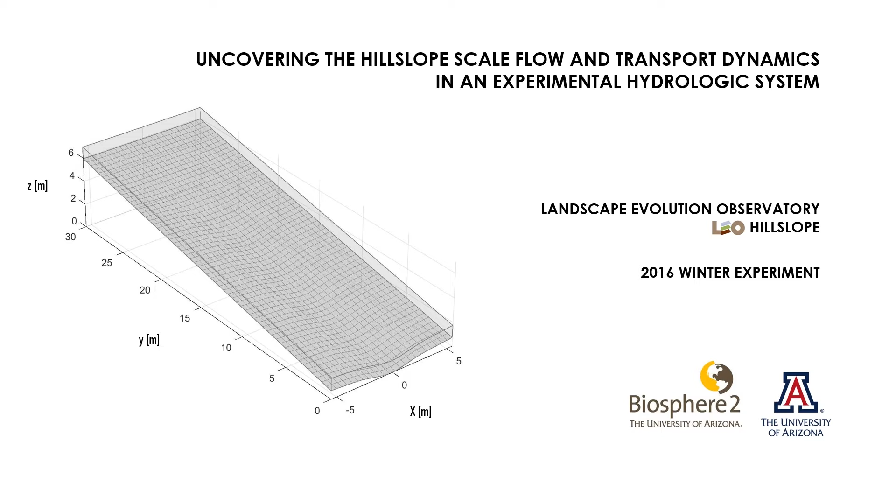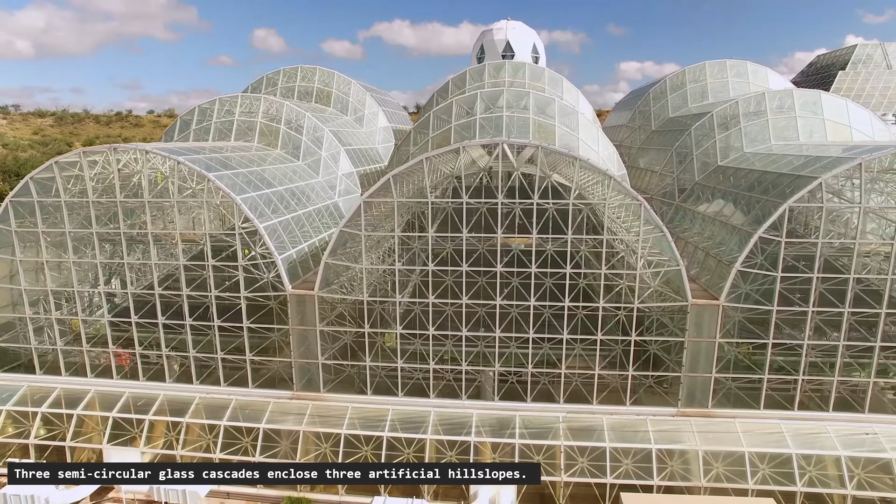The Landscape Evolution Observatory, LEO, is located within the Biosphere 2 research facility in southern Arizona. Within this structure, 3 semicircular glass cascades enclose 3 artificial hill slopes. Let's take a look at one of the hill slopes from inside.

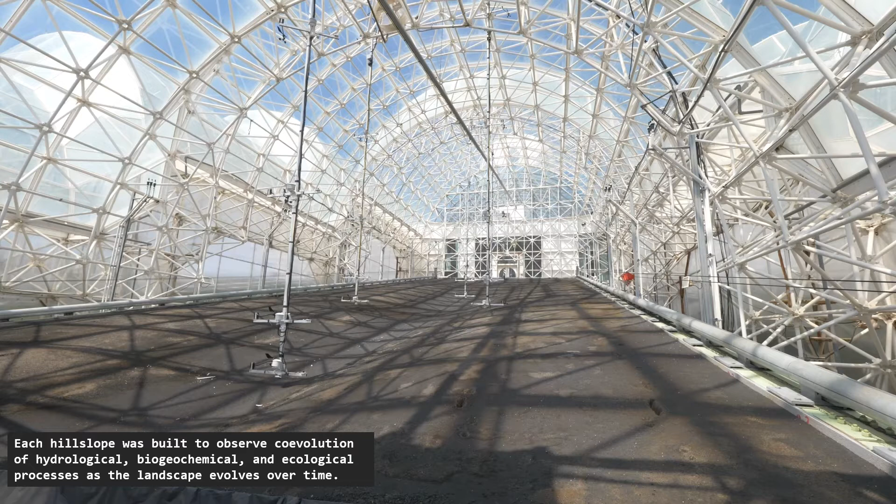Each hill slope was built to observe coevolution of hydrological, biogeochemical, and ecological processes as the landscape evolves over time. LEO is currently in a bare soil phase. In coming years, researchers at LEO will add vascular plants to drive the landscape towards a more complex system.

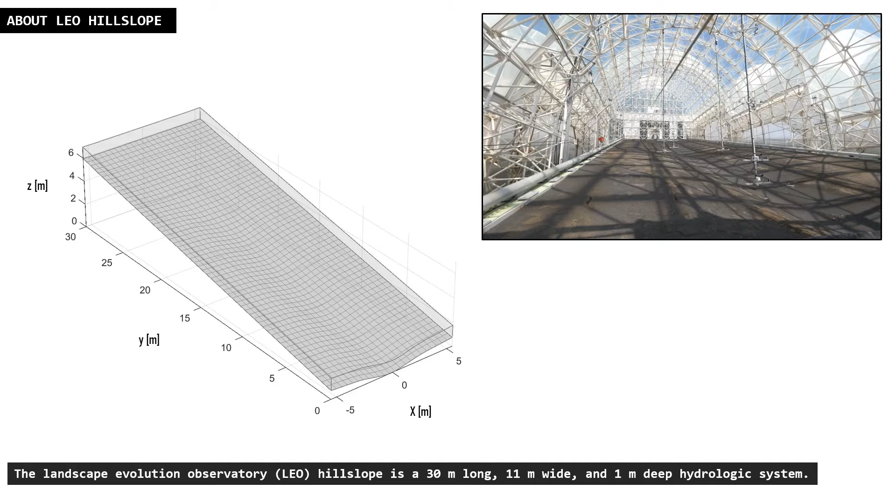The Landscape Evolution Observatory hill slope is a 30-meter long, 11-meter wide, and 1-meter deep hydrologic system. The LEO hill slope is a zero-order basin with a convergent topography and an average slope of 10 degrees.

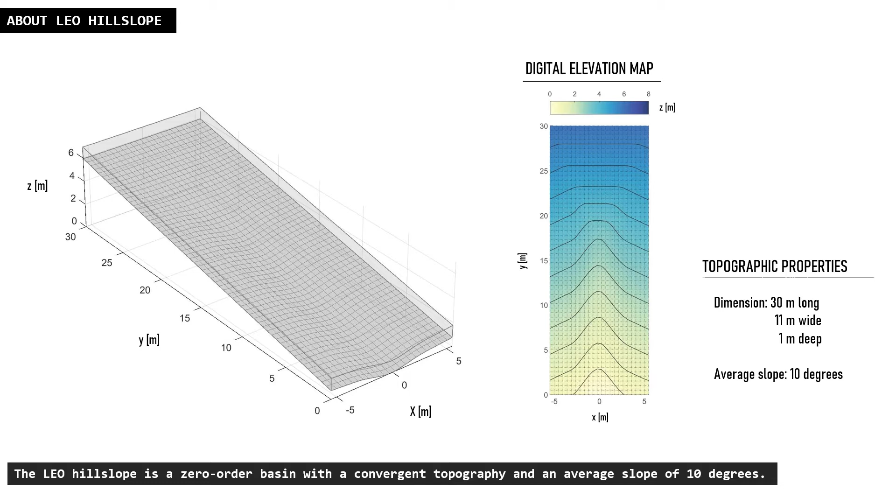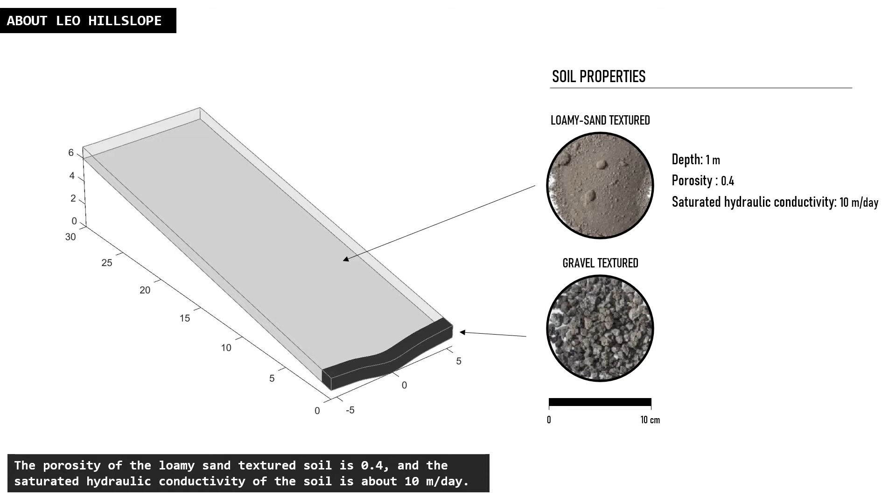Each hill slope is primarily made up of loamy sand-textured basaltic tephra. The most downslope, 5.5 cubic meters, is filled with gravel-textured basaltic tephra. The porosity of the loamy sand-textured soil is 0.4, with a saturated hydraulic conductivity of about 10 meters per day.

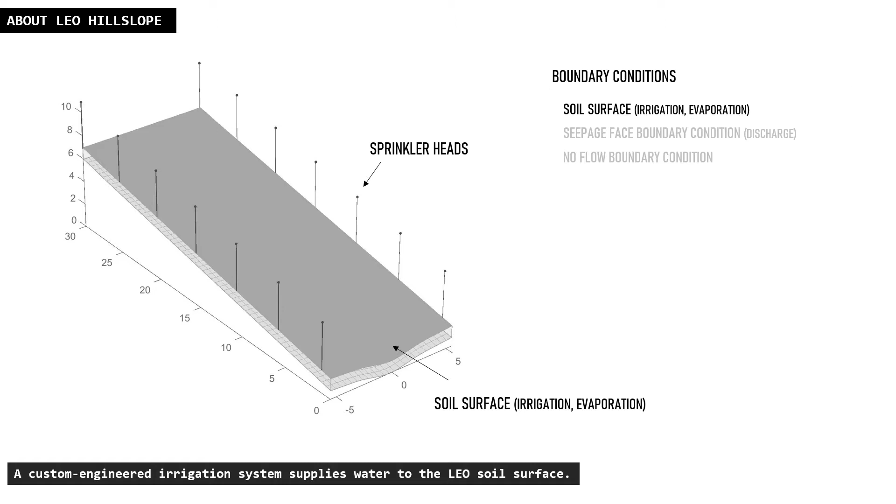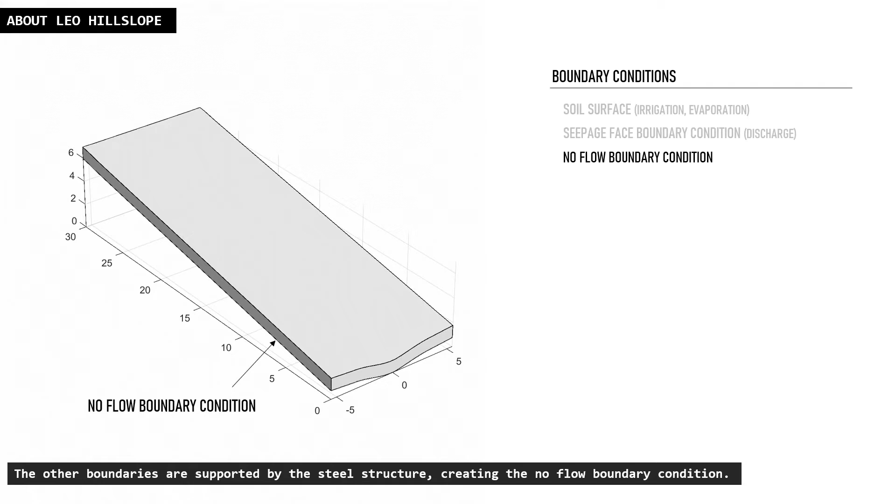A custom-engineered irrigation system supplies water to the LEO soil surface. The downslope boundary is exposed to atmospheric pressure, creating the seepage face boundary condition. The other boundaries are supported by the steel structure, creating the no-flow boundary condition.

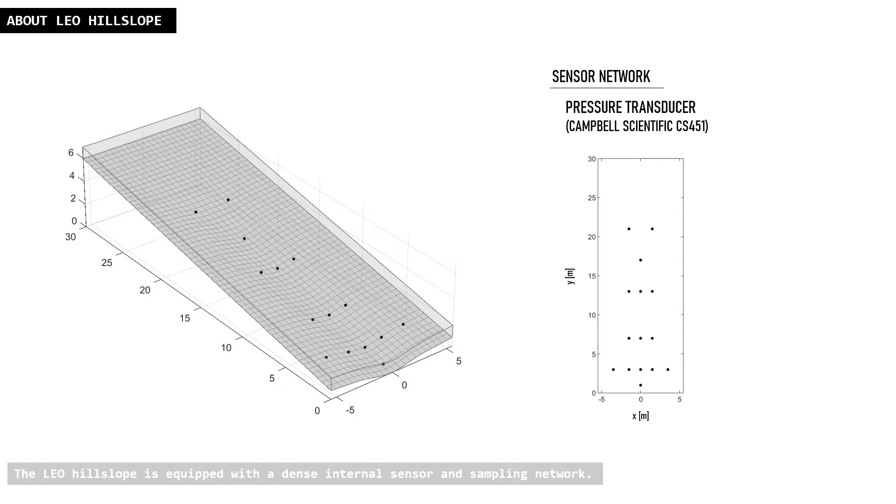The LEO hill slope is equipped with a dense internal sensor and sampling network. 15 Campbell Scientific CS451 pressure transducers measure water pressure along the base depths of the hill slope every 15 minutes. Assuming hydrostatic pressure, the measured pressure can be converted to water table height.

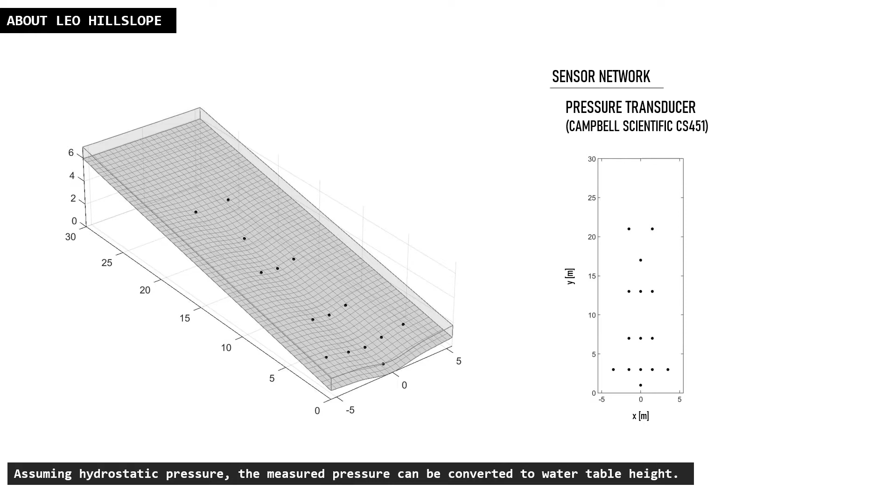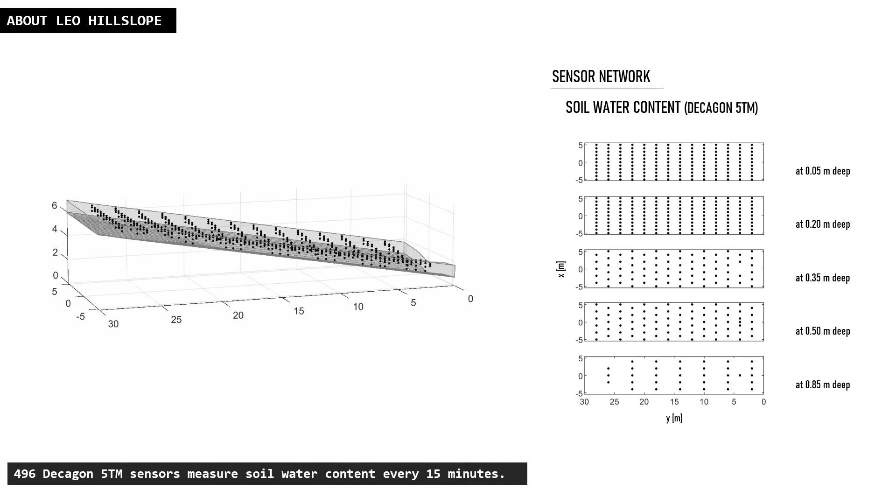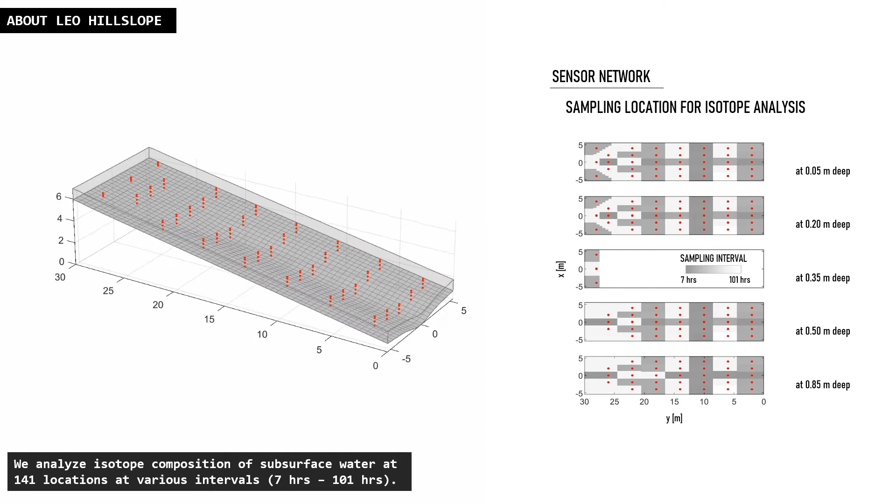496 Decagon 5TM sensors measure soil water content every 15 minutes. We analyze isotope composition of subsurface water at 141 locations at various intervals, ranging from 7 hours to 101 hours.

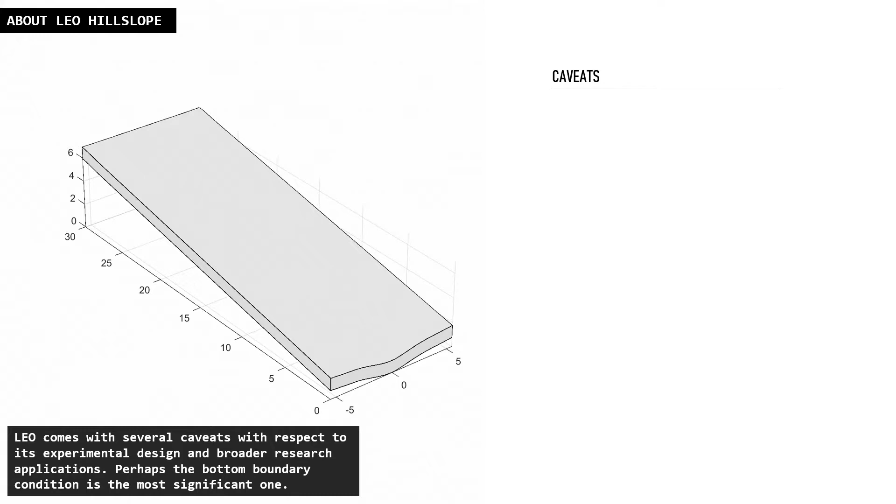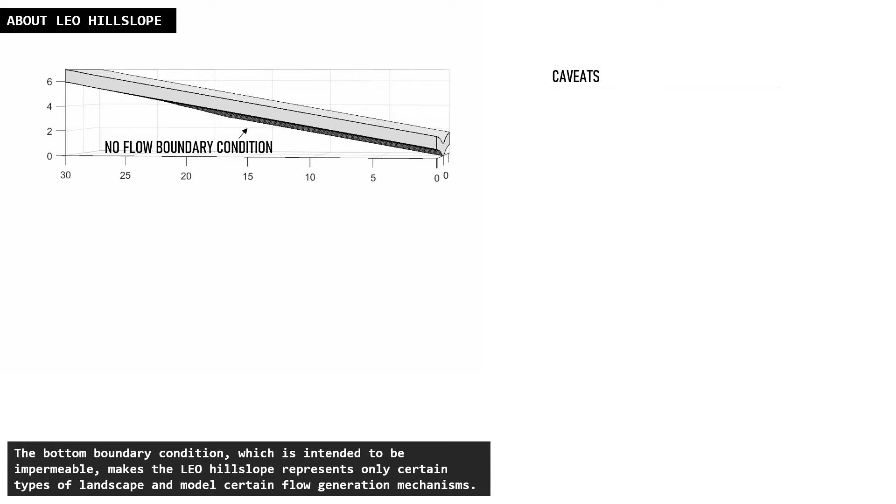LEO comes with several caveats with respect to its experimental design and broader research applications. Perhaps the bottom boundary condition is the most significant one. The bottom boundary condition, which is intended to be impermeable, makes the LEO hill slope represent only certain types of landscapes and model certain flow generation mechanisms.

The LEO hill slope mimics a landscape with shallow depth to bedrock, like the hill slope shown on the left. In landscapes with deep depth to bedrock, the dynamics inside the LEO hill slopes might represent the perched water table dynamics above an aquiclude.

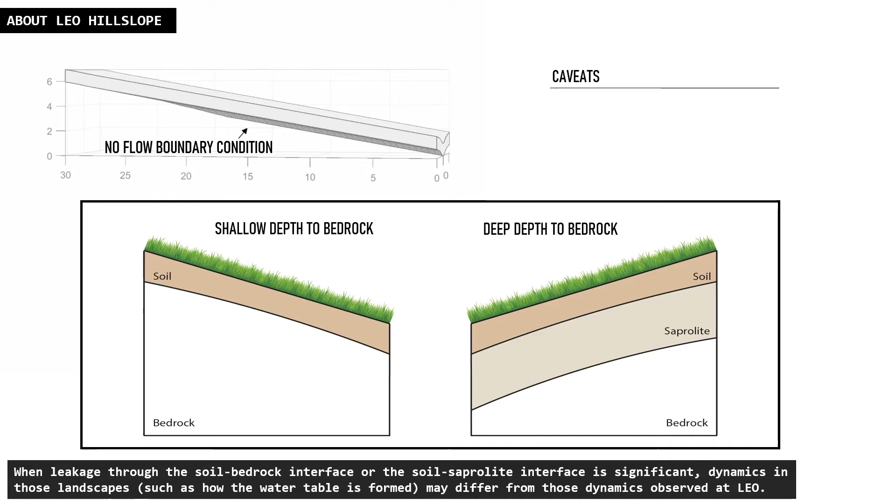When leakage through the soil-bedrock interface or the soil-saprolite interface is significant, dynamics in those landscapes, such as how the water table is formed, may differ from those dynamics observed at LEO. Again, these LEO hill slopes may differ from natural landscapes in several aspects, like what we've described in the previous slides.

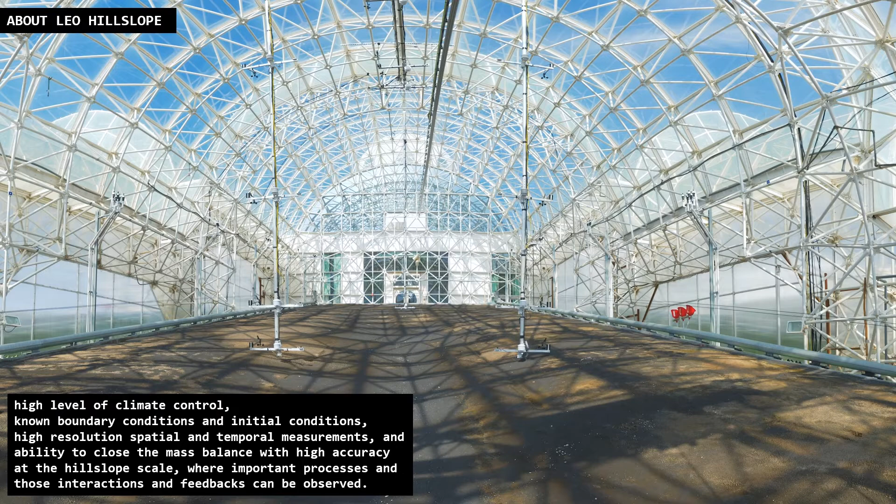In spite of these differences, LEO comes with several key advantages for conducting experiments and testing models, including high level of climate control, known boundary conditions and initial conditions, high-resolution spatial and temporal measurements, and the ability to close the mass balance with high accuracy at the hill-slope scale, where important processes and those interactions and feedbacks can be observed.

With these experimental advantages, we conducted the following bare soil experiment that gives newfound insight into hill-slope scale water flow and transport dynamics. This video presents a set of experimental data collected from December 1st, 2016 to December 22nd, 2016.

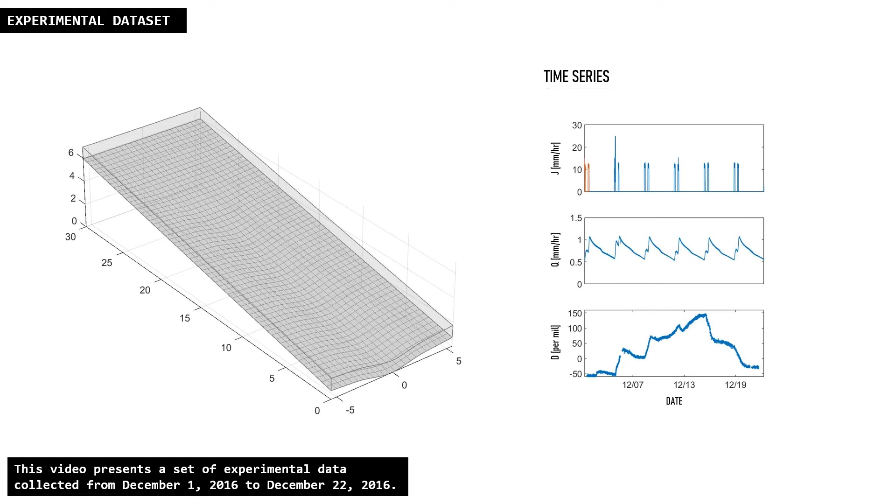During this period, an irrigation sequence was repeated every 3.5 days. Each sequence consisted of two 3-hour, 12 millimeter per hour pulses that are 7 hours apart.

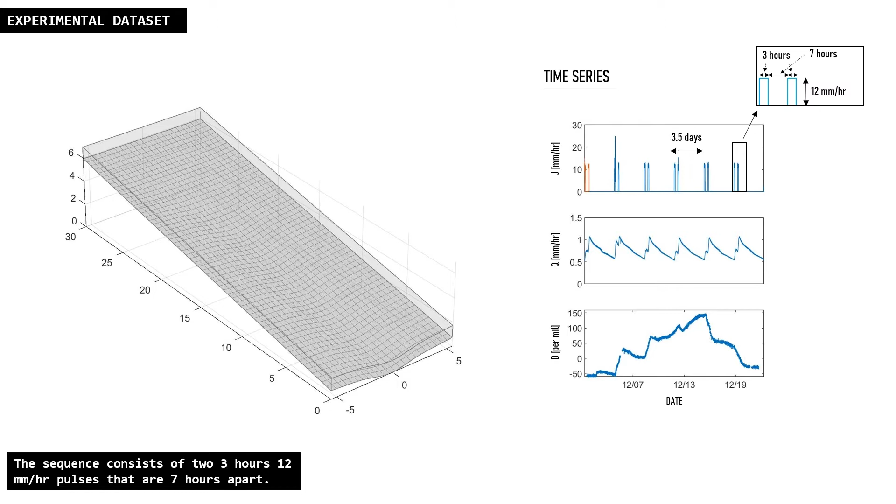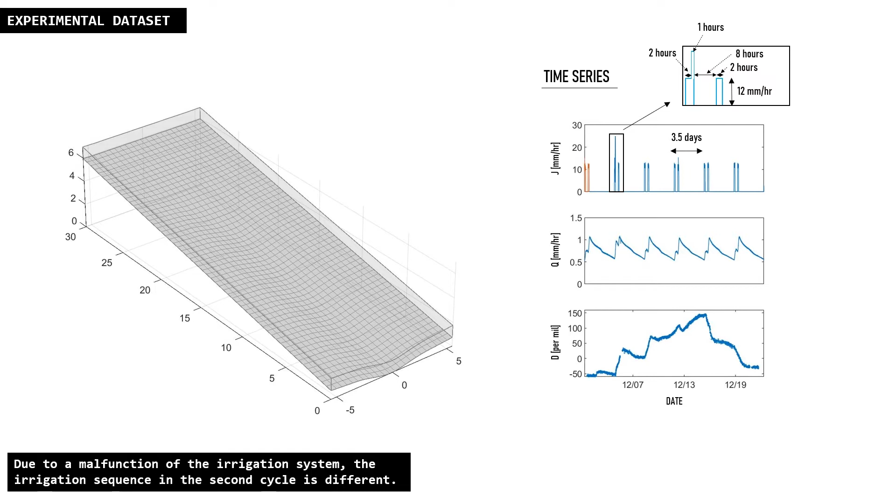Due to a malfunction of the irrigation system, the irrigation sequence in the second cycle is different. The irrigation rate during the last hour of the first pulse was doubled. Therefore, the second pulse was irrigated for only 2 hours.

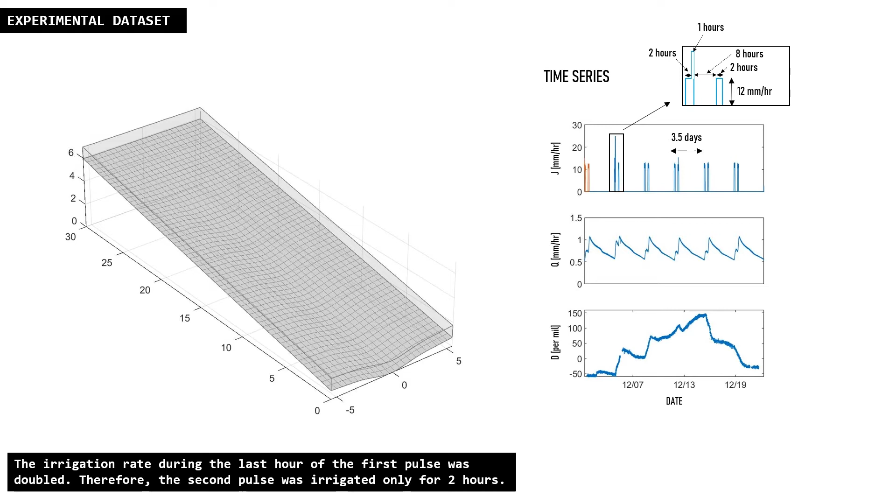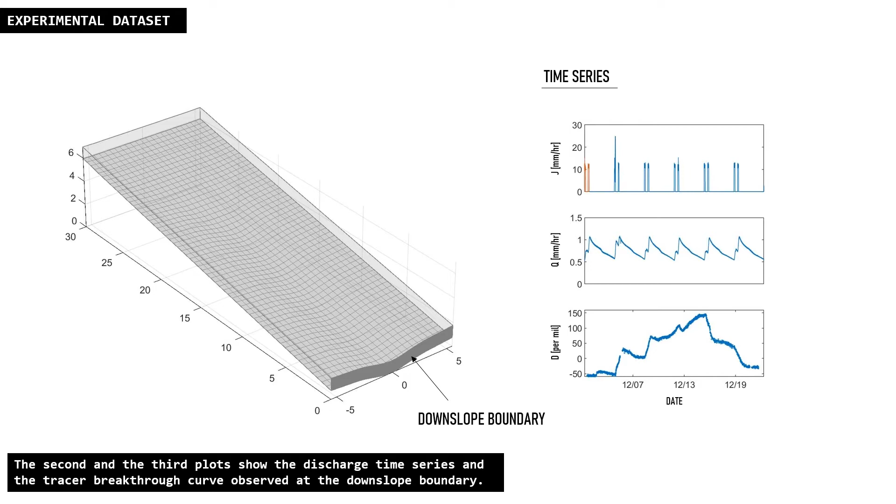We irrigated about 500 per mil deuterium-labeled water during the first cycle. The second and third plots show the discharge time series and the tracer breakthrough curve observed at the downslope boundary. Let's take a look at the flow dynamics.

For visualization purpose, the soil depth is magnified by a factor of 3. In this 3D animation, the extent of the saturated zone is the Delaunay triangulation of the observed water table height at the 15 locations.

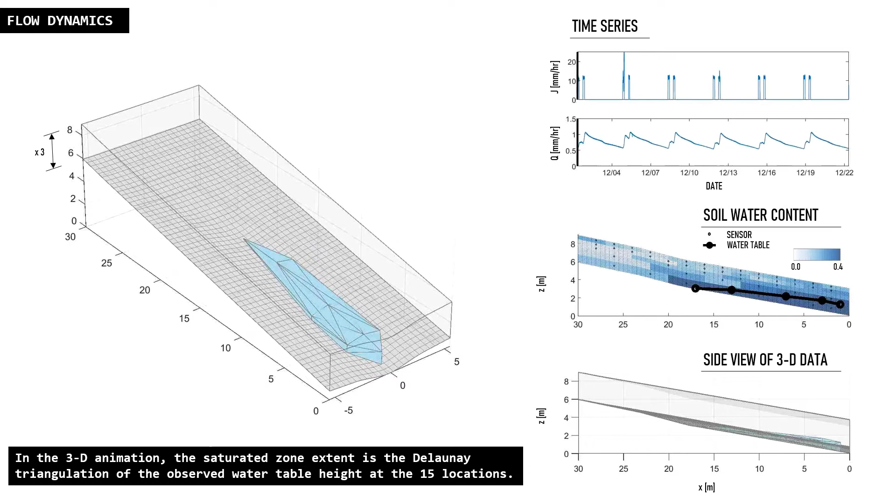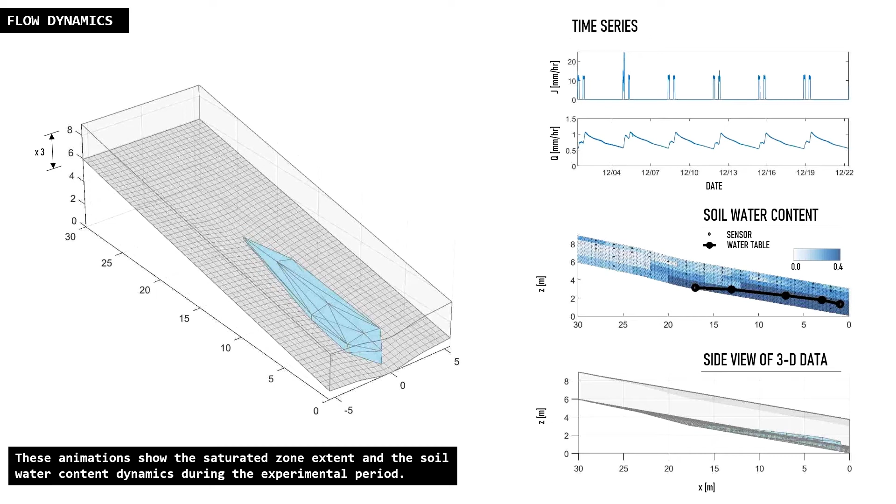These animations show the extent of the saturated zone and the soil water content dynamics during the experimental period. The saturated zone illustrates two dynamics: one, the wetting up from the bedrock surface into the soil profile, and two, the saturation from downslope to upslope.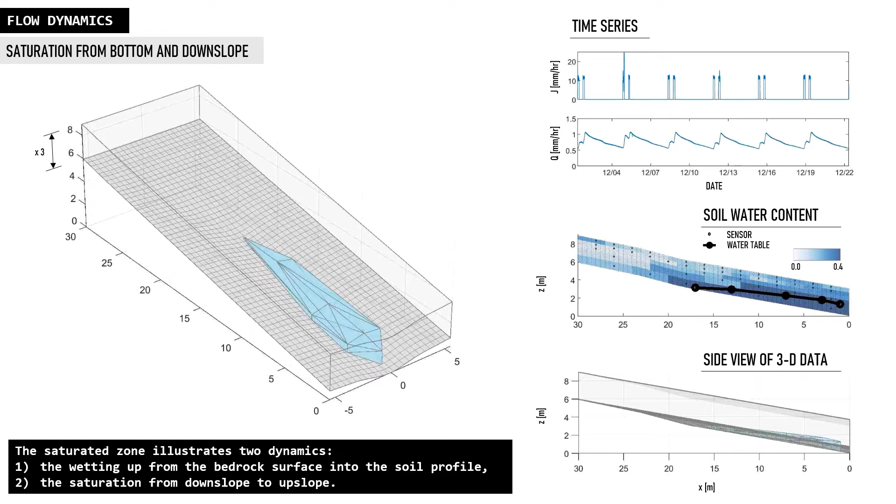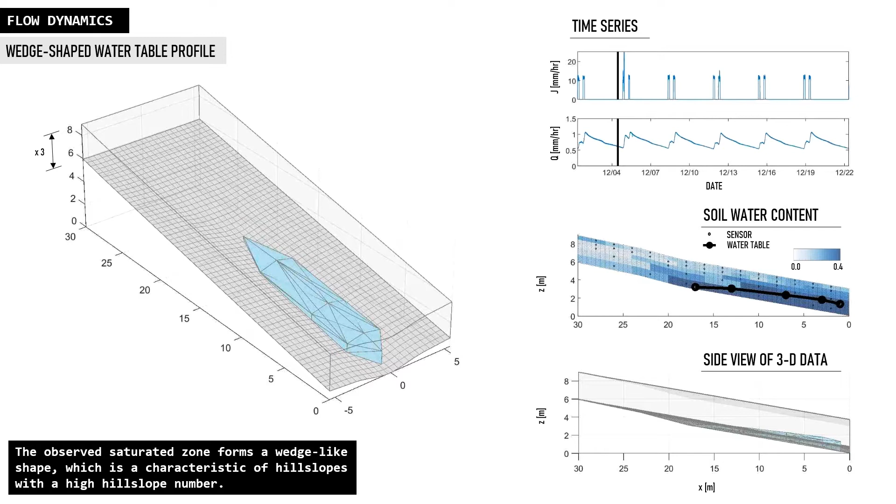The observed saturation zone forms a wedge-like shape, which is a characteristic of hill slopes with high hill slope numbers. The hill slope number is a dimensionless number that explains the relative importance of the advective water dynamics to the diffusive water dynamics in the subsurface.

When the hill slope number is high, the advective water dynamics dominate over the diffusive water dynamics, which is usually a characteristic of steep hill slopes. The hill slope number for the LEO hill slope was high during this experiment.

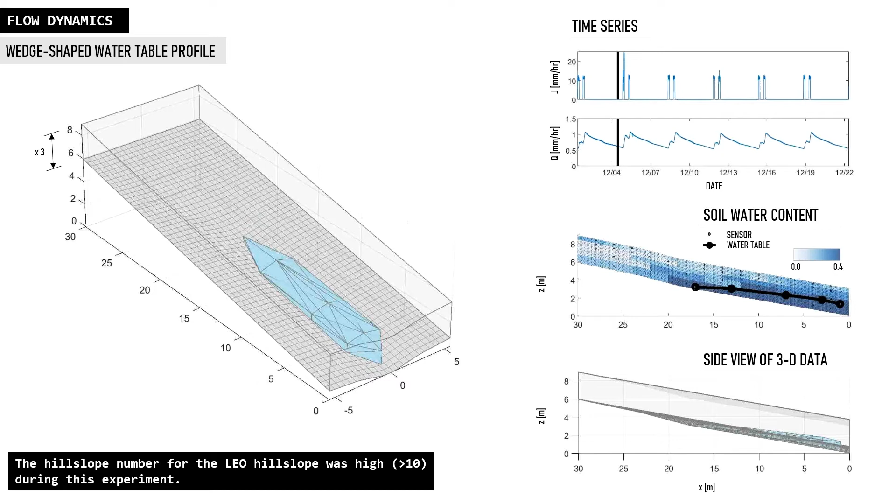Also, significant time delays were observed in the water table dynamics at the upslope locations. For example, the water table height at 13 meters upslope reaches its peak about 3 days after the last irrigation pulse.

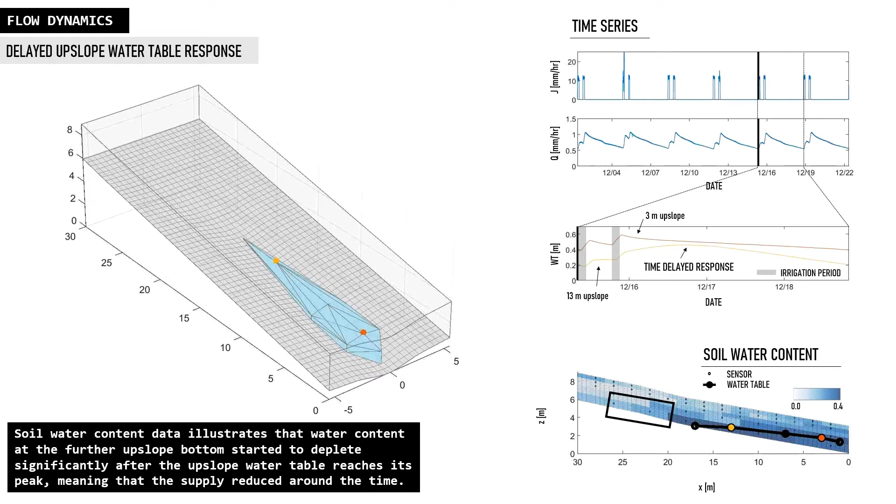This delay is mostly due to the continuous water supply from upslope. Soil water content data illustrates that water content at the further upslope bottom started to deplete significantly after the upslope water table reaches its peak, meaning that the supply reduced around that time.

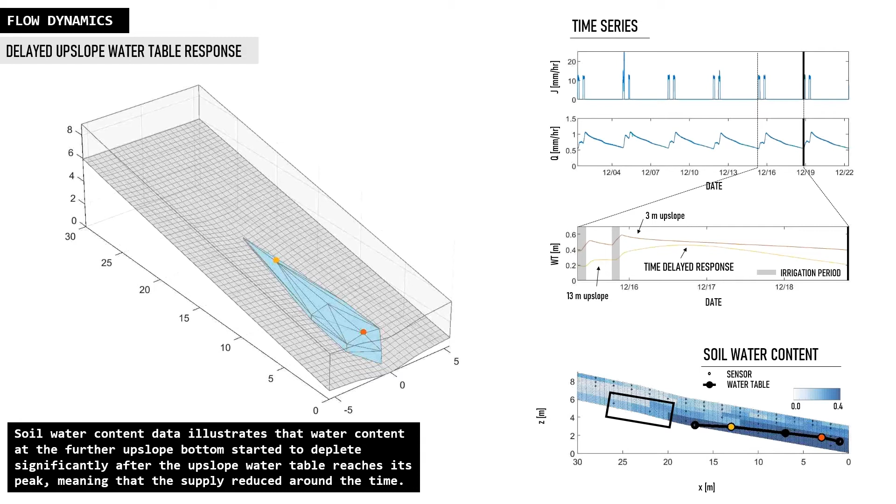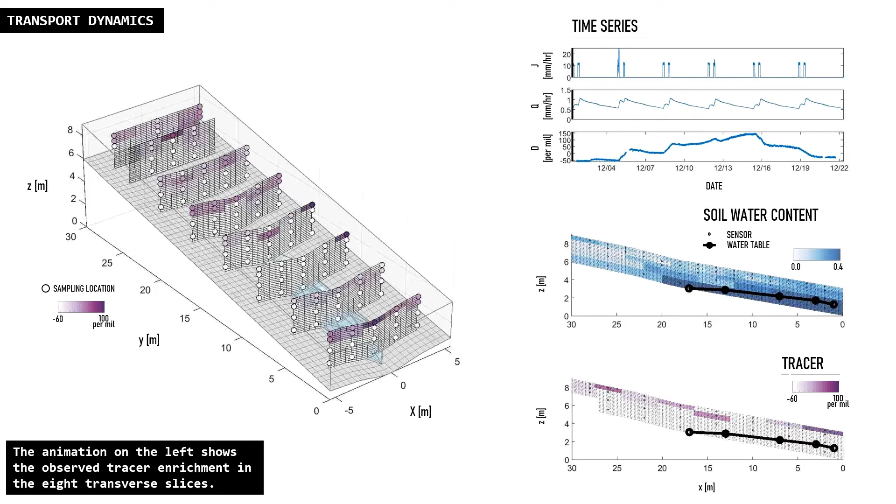Now we are going to show the tracer dynamics inside the hillslope. The animation on the left shows the observed tracer enrichment in the 8 transverse slices. The animation on the bottom right shows the observed tracer enrichment in the longitudinal slice at x equals 0 meters. Let's first take a look at the animations for the whole experimental period.

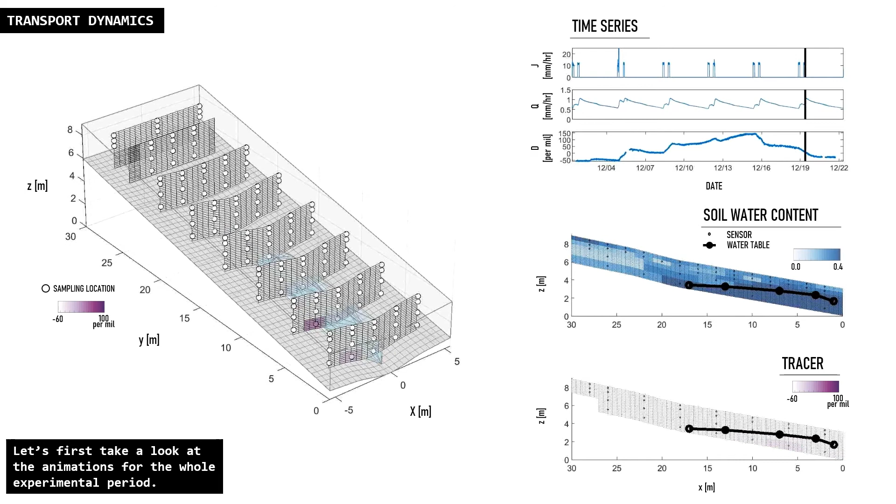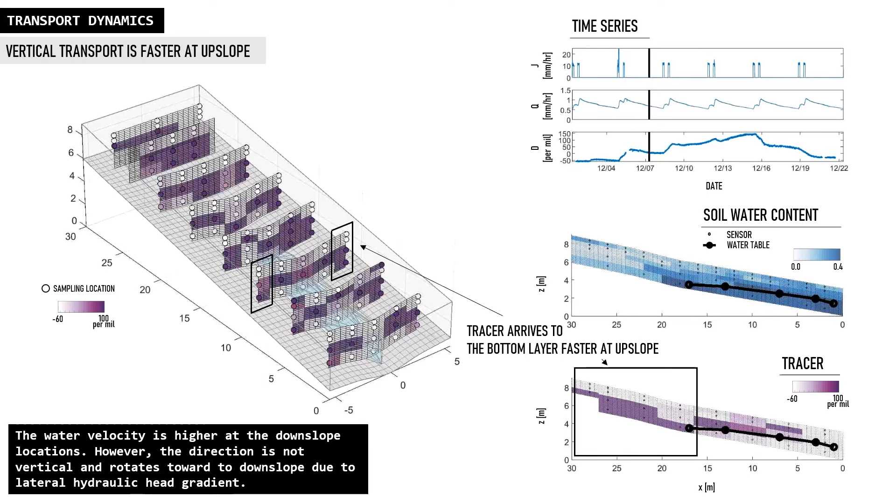These animations show that vertical transport is faster at upslope locations. This is, in a sense, counterintuitive because the upslope is drier. This faster upslope vertical transport is due to more significant lateral flow at downslope locations. The water velocity is higher at the downslope locations. However, the direction is not vertical and rotates toward the downslope due to lateral hydraulic head gradient.

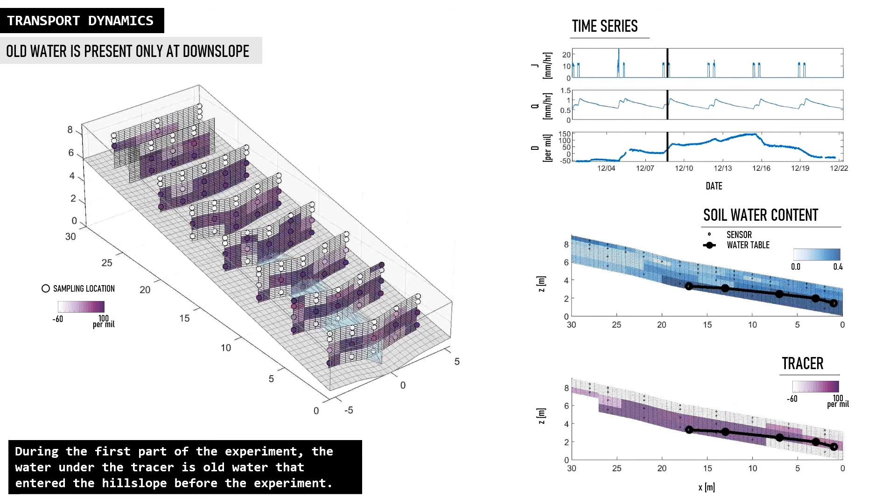In addition, we can roughly examine the water age structure inside the hillslope. During the first part of the experiment, the water under the tracer is old water that entered the hillslope before the experiment. The experimental data show that old water is mostly present at the downslope region. Over time, the tracer-labeled water gets old.

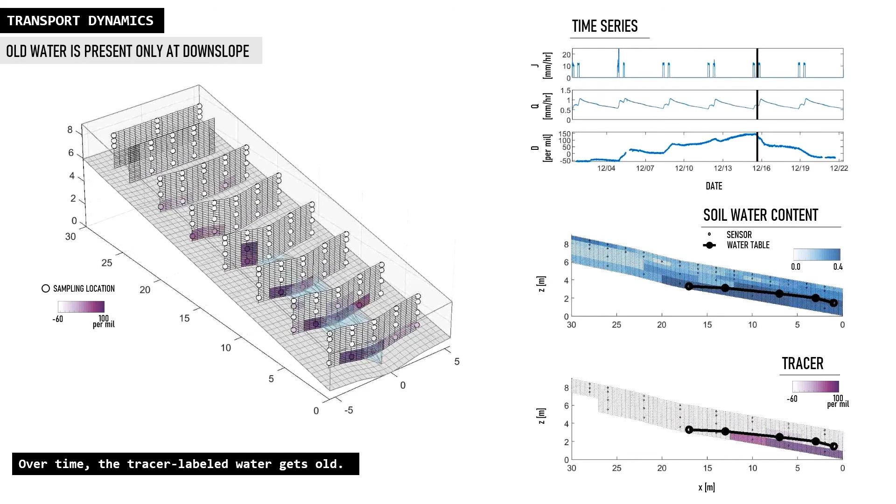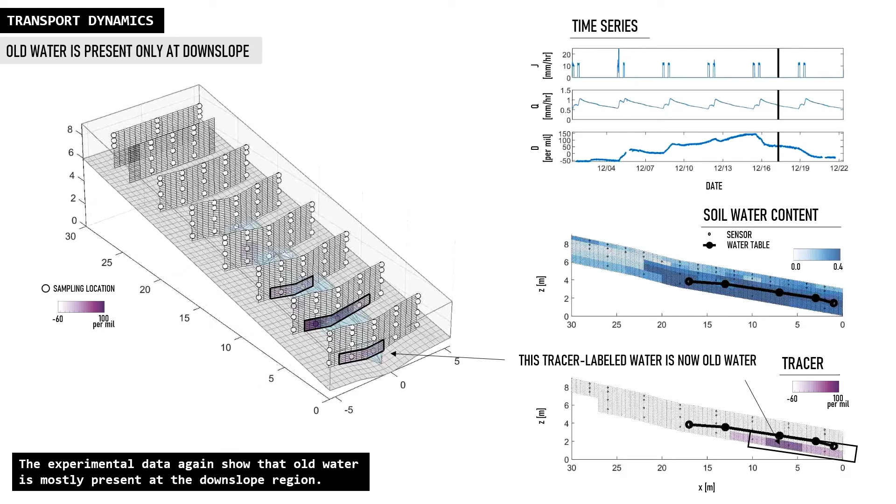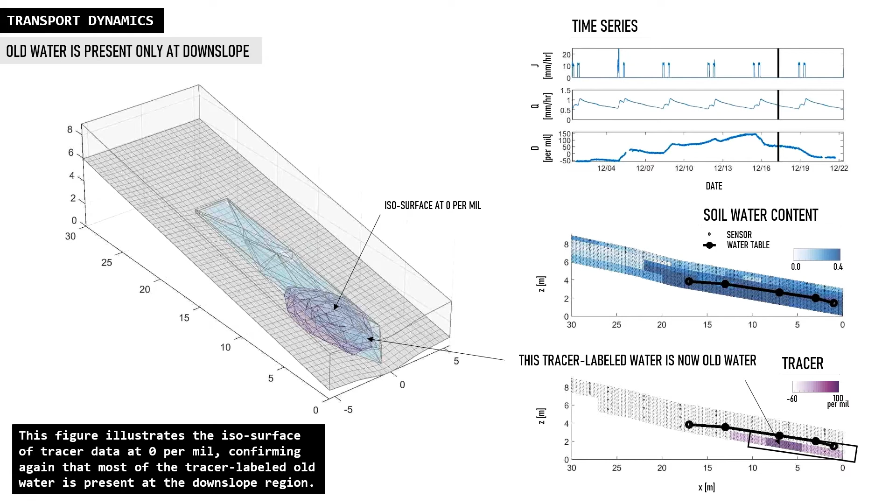The experimental data again show that old water is mostly present at the downslope. This figure illustrates the isosurface of tracer data at 0 per mil, confirming again that most of the tracer-labeled old water is present at the downslope region.

This is a characteristic of hillslope with a high hillslope number. The figure on the left shows the modeled steady-state saturated zone age structures for 2 hillslope numbers. When the hillslope number is high, old water, which was recharged at the upslope, moves downslope due to the advective water dynamics, so the old water is present only at the downslope region.

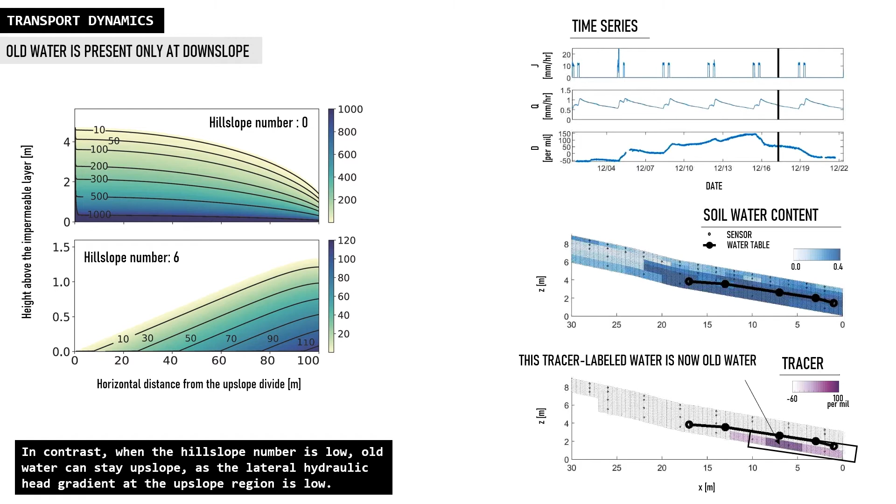In contrast, when the hillslope number is low, old water can stay upslope, as the lateral hydraulic head gradient at the upslope region is low. This indicates that hillslopes with high hillslope numbers preferentially discharge old water in the system.

This finding can explain a feature of the observed storage selection function, also known as the SAS function, that describes spatially lumped system-scale transport dynamics using water age. Let us briefly explain what the SAS function is.

First, let us conceptualize a hydrologic system, like the diagram on the right, and explain water transport dynamics of the system using water age. In the diagram on the right, J is precipitation, Q is discharge, and ET is evapotranspiration.

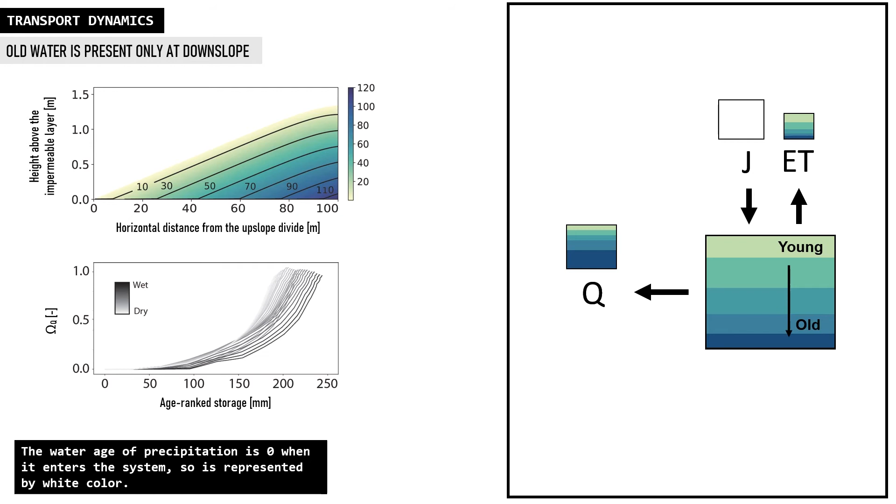The color indicates water age in the system and in fluxes. Light green represents young water, and dark blue represents old water. The water age of precipitation J is 0 when it enters the system, so it's represented by a white color. For this system, we need 2 SAS functions to fully describe the transport dynamics, one for discharge and another for evapotranspiration. In this animation, we focus on the discharge SAS function.

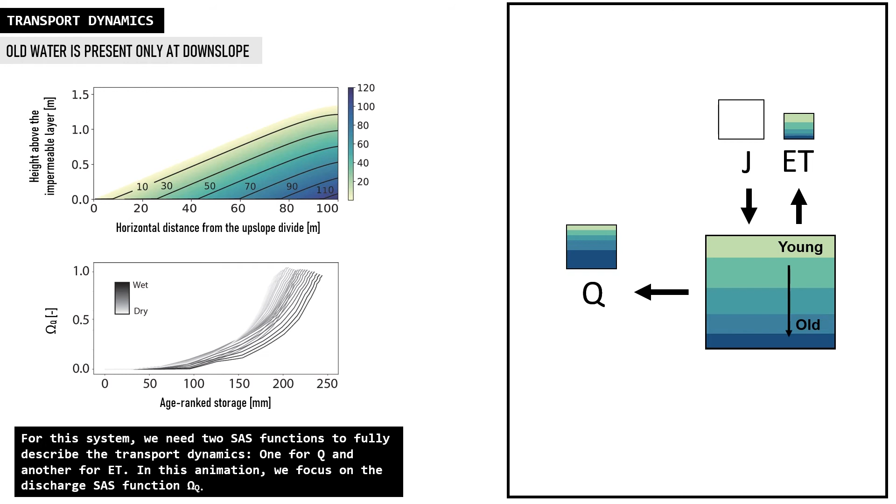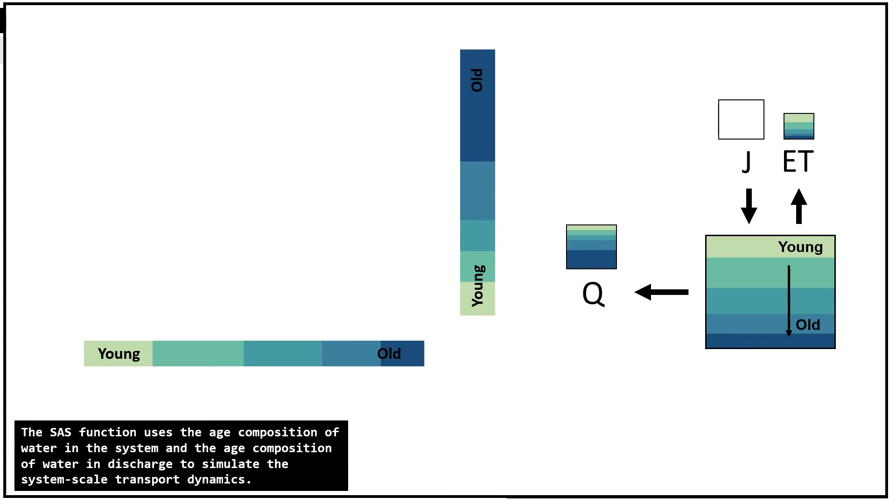The SAS function uses the age composition of water in the system and the age composition of water in the discharge to simulate the system-scale transport dynamics. The age structure inside the system can be characterized by the age-ranked storage, which is the volume of water inside the system ranked by age, from the youngest to the oldest. It is defined up to S, which is the storage of the system.

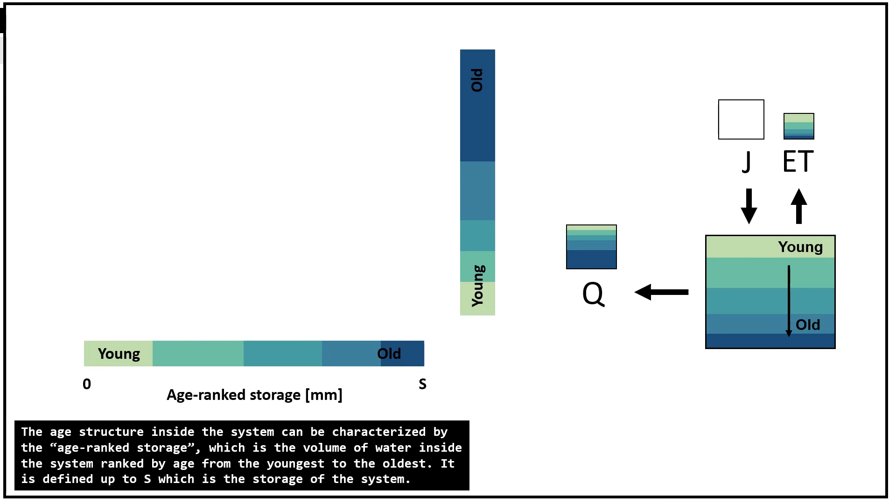The age structure inside the discharge can be characterized by the age-ranked discharge. Here, we normalize it so it can be defined from 0 to 1. The SAS function will be drawn in the white box. The x-axis of the SAS function plot is the age-ranked storage, and the y-axis of the SAS function plot is the normalized age-ranked discharge.

When we shift the age fraction in the discharge to the corresponding age-ranked storage and draw a line that connects the same water age, we get the SAS function. The SAS function explains the system-scale transport dynamics by relating the water age structure inside the system to the water age structure in the discharge.

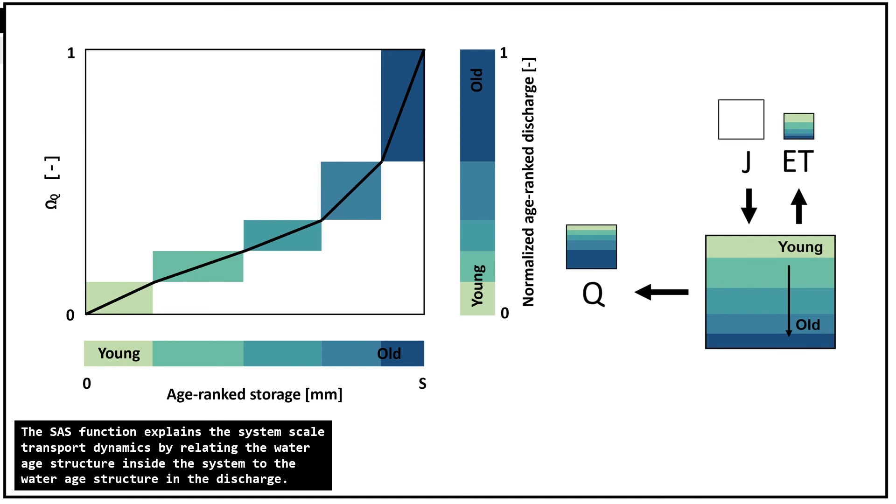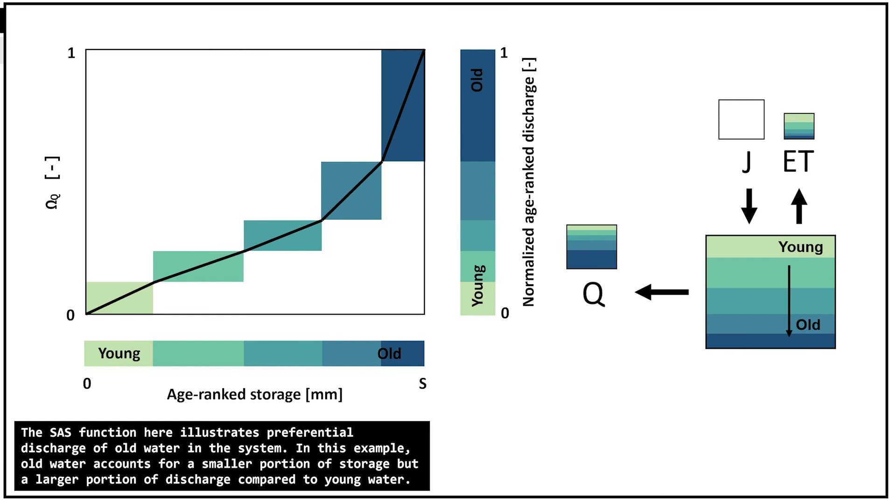The SAS function here illustrates preferential discharge of old water in the system. In this example, old water accounts for a smaller portion of storage, but a larger portion of discharge compared to young water. Note that this function is time variable because the water age structure of storage and the water age structure of discharge both vary over time.

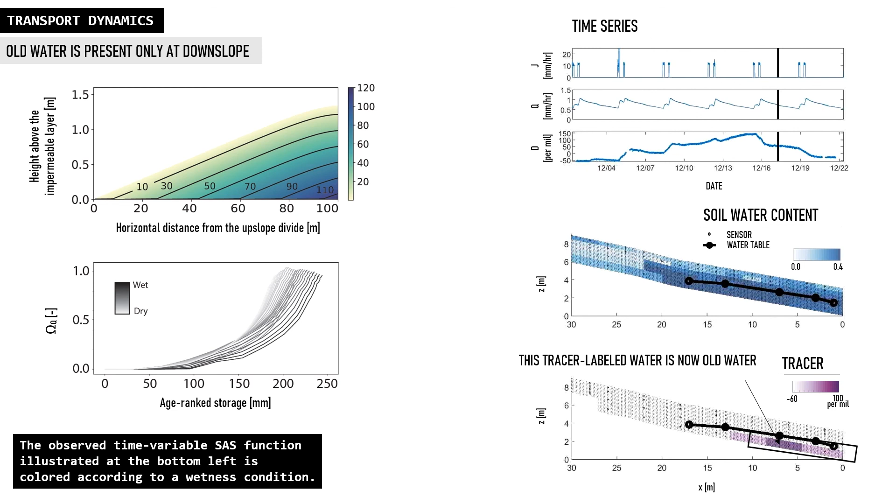The observed time variable SAS function, illustrated at the bottom left, is colored according to a wetness condition. The observed function indicates that the hillslope preferentially discharged old water in the system. The preferential discharge of old water in the system, again, is a characteristic of hillslopes with a high hillslope number.